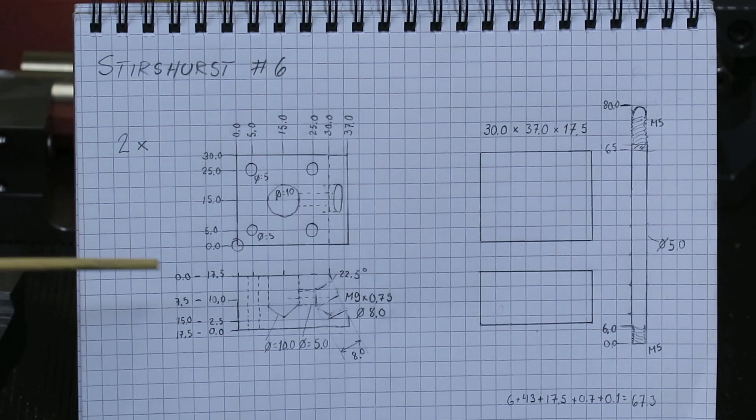So it's a rectangular piece of steel which we then will make into Swiss cheese. There will be one big hole in the center and one slanted side, at 22.5 degrees. Then there will be a 9mm fine thread, and 4 holes poked all the way through. I guess that's about it. Oh yeah, a small hole here in between.

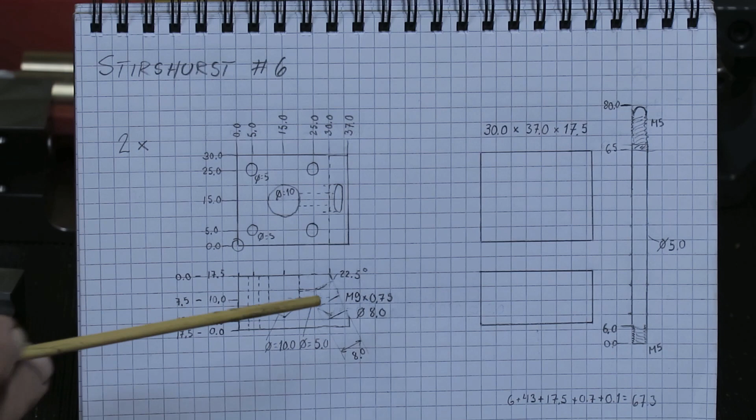So this is one of those. We start in the mill and make 2 couples of pieces like this. The material I'm going to use is this, which you probably recognize from the earlier project. It was scrap, now it's raw material.

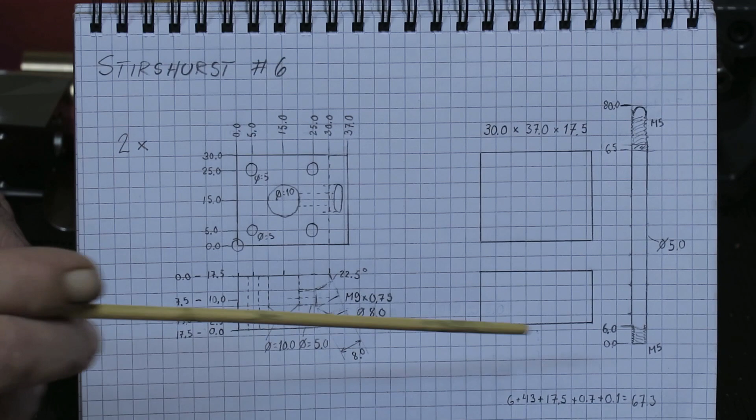And then we will make 8 couples of studs like this. Very simple. Well, I don't have the 5mm stock, so I need to make it from 10mm, which is really abundant, so I will use that.

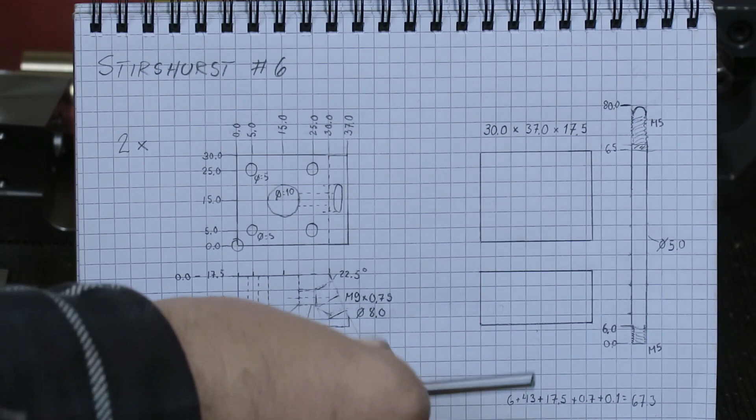I tried already, so you can actually make it quite neat. This is just a try to see how it goes in the lathe. It goes well. Okay, and that's too short, so let's start with milling this one to the correct size.

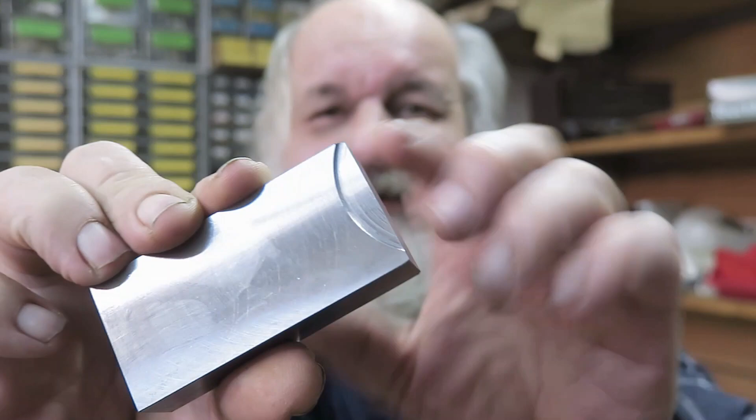I almost ruined this material. If you can see this here, I was supposed to take 0.1mm off this one. This is now exactly 0.9mm below the surface. For some reason I thought, okay, 1mm more, it should have been 0.1. So now, luckily, I looked at it again and that doesn't look like 0.1mm. No, it does not. And we have barely enough material for this one.

So, next step, I will clean the mess I have made. It's quite a lot of that. After that, I will use this slitting saw to take 2 30mm parts of this piece. And why slitting saw, why not hacksaw? Because it takes care of the finished surface in one go. So that's the reason why slitting saw, and I have that. So that's another reason. One of the things you should really do, and do it properly, is clean up.

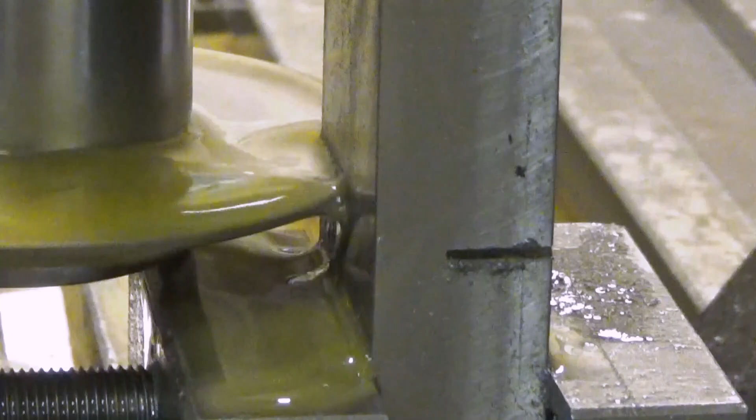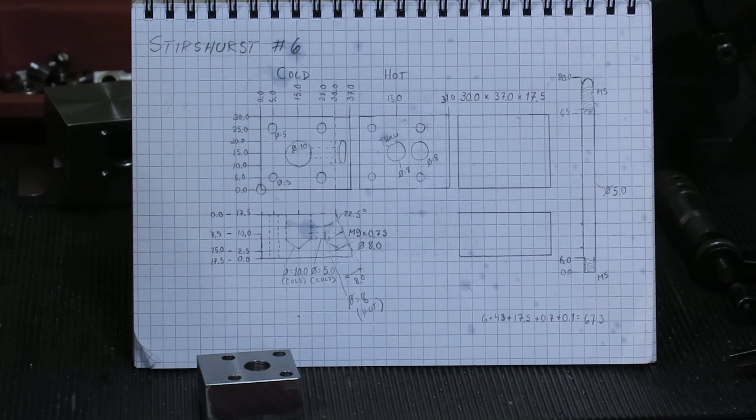The slitting saw was both a bad and a good idea. It was a good idea, but I chose the wrong type of slitting saw, so therefore it was really noisy. I managed to get a very bad surface finish in some parts here. But now everything is all right. And this one, I already did something here — I made this Swiss cheese thing here.

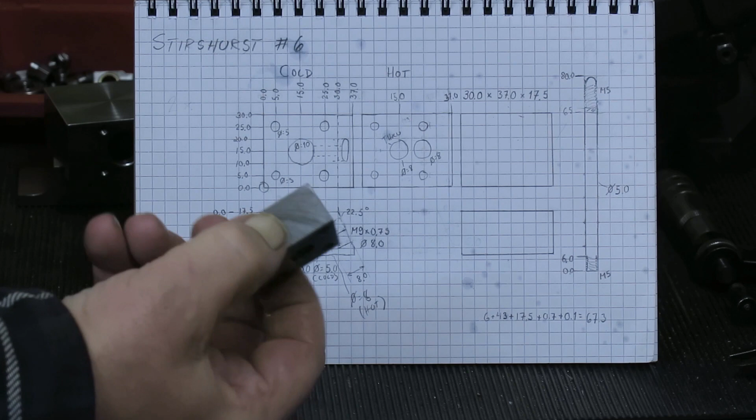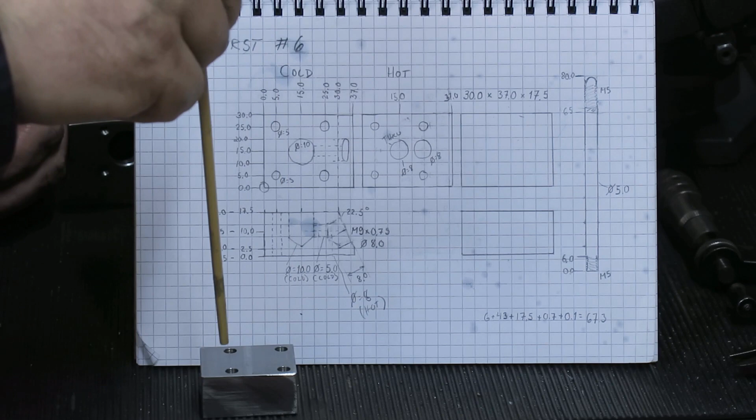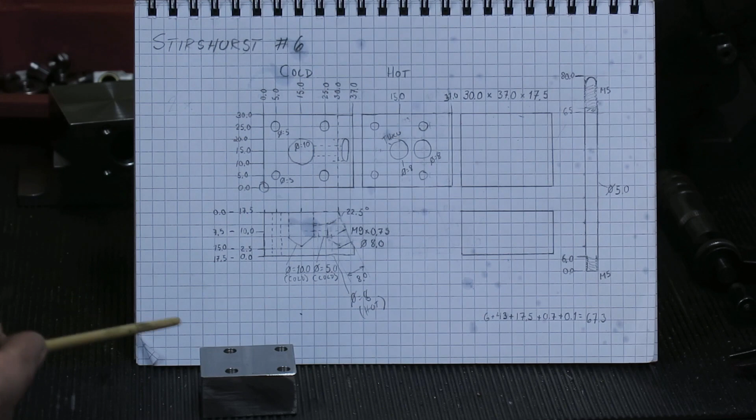So now there is a change of plan. Namely, it won't be two identical pieces. It will be one for the cold side and one for the hot side. The hot side will be different in that there will be two holes all the way through on this side. The center hole will go all the way through to the cylinder, and then we'll have another one which is not all the way through, so that I can put a loop of copper tube here. This is of course to collect the warmth — a heat collector, so to say. And the cold side is as stated here.

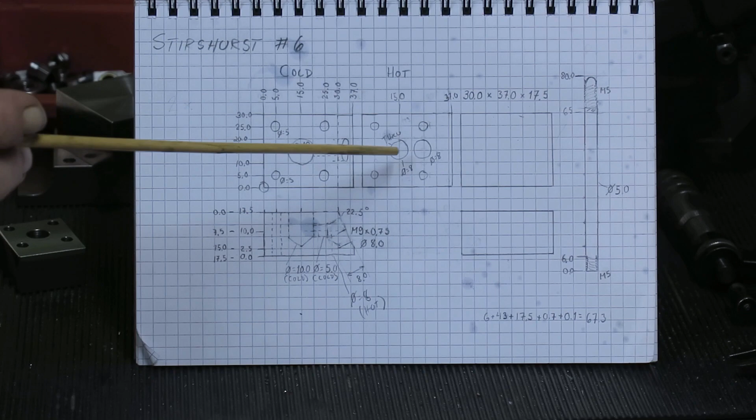So now what I will be doing is the hot side. I already did this, so some of the settings are already in place, but we need to do some dialing for the x-axis, and then we just drill a few holes.

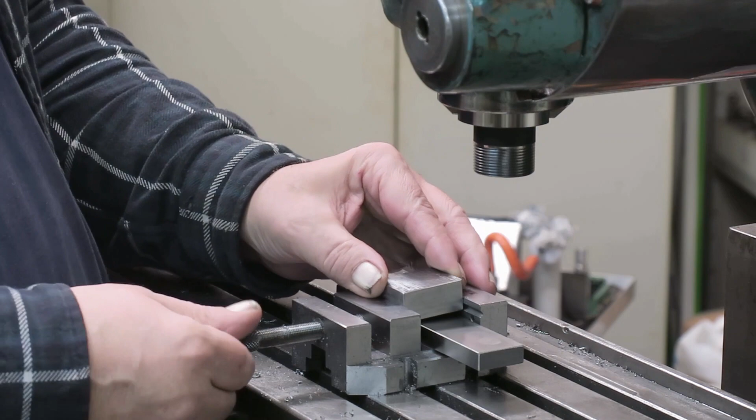Put this piece into the vise somewhere here. I have already cleaned up this quite well, so there won't be any chips on the way. So now it is there somewhat, but it's not tight enough. So, as always, a little bit of hammering, very gently. You can hear it's not all the way in. This was not successful. Now it is.

You can also — okay, well, this lifts the jaw, I believe. Well, this should be taken off anyway. Well, it is now there. It's good for our holes. Anyway, set this one to our reference side.

Well, I have purchased a new tool — yeah, this one. And we need a little bit of speed with this one; it won't work with low speed. We'll do a little bit up, I believe. Let's see now. We don't need to adjust the Y because it's already adjusted. And now I'll just — well, yeah, let's see.

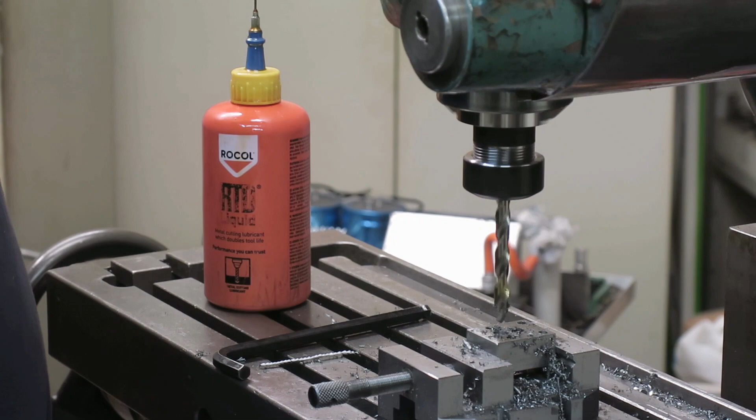Okay, now this is ready, this part of the job. Next thing I will again clean a little bit because I need to change the vise here. This is not a good vise for what we are doing next.

So I have another type of vise for that. Setting up the angle to be able to mill this tilted surface on these ones. This is a vise that I purchased quite a long ago, mainly for manual jobs, but it has proven to be quite good for this one.

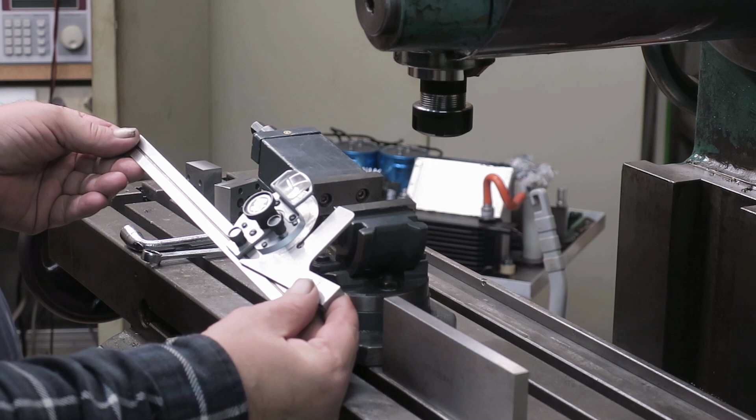Okay, so this one is my Hahn & Kolb Stuttgart protractor. I have set this up to... have I? No, I have not. It's 11.5, it should be 12.5 degrees. Now it is. So, no, and not 12, it should be 22.5 degrees.

So, 22.5. Huh. Oh yeah, hopefully this is okay. Okay, maybe I can. I have to.

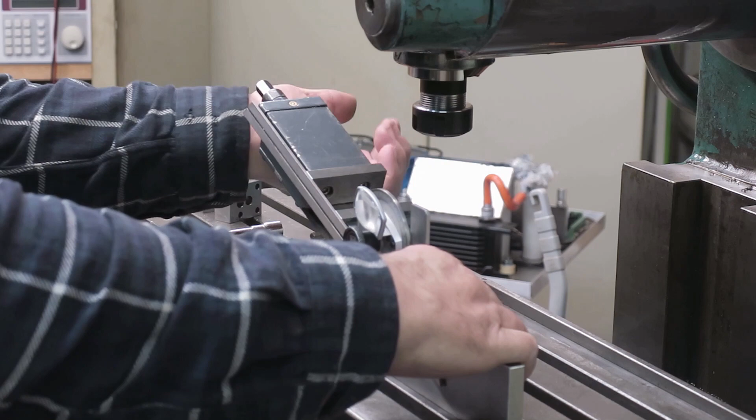Oh yeah, okay, so now I will adjust this vise to be on that. Okay, I can do this. So I feel these edges here, this is a little bit awkward. No, it's quite near, now it's over.

There you are. It's not like second precision, but it suffices for this job. And now I tighten this, and now we should be in the correct 22.5 degree angle here, so it should be half of 45 degrees.

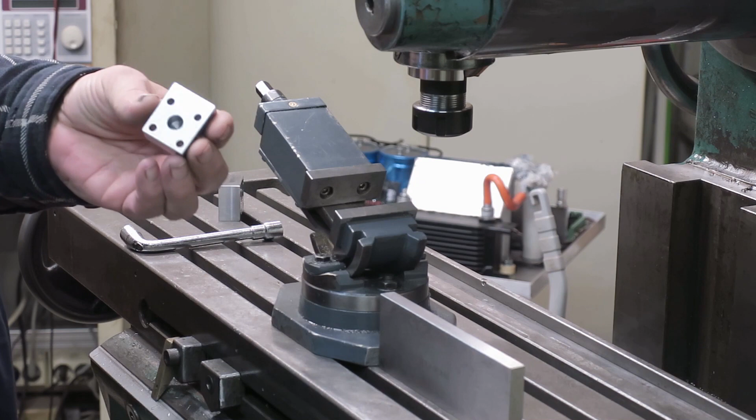And now putting these into the vise, it's really important that you put them in the correct way. So this is the top side and it should be tilted this way. If I put it that way, the end result will be wrong. This way, right.

And also there are some things where it really doesn't matter in which orientation this is. Because this is not 13 millimeters, it will be 14. Why on earth do they put different fasteners here? Yeah, it is 14.

So this orientation doesn't really matter. This is because all that matters is that it is planar in horizontal orientation. So I will put it somewhere like here. There you are, and now tighten the vise.

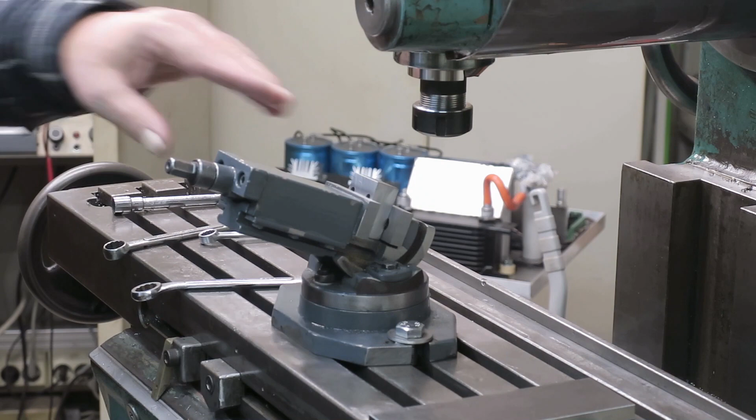Well, there you are. First piece is there, and now hopefully I need to recheck this one. So it's lower this side, and this is the underside. Yeah, that's correct, and this is actually the cold side cylinder head. So okay, next step, mill it down.

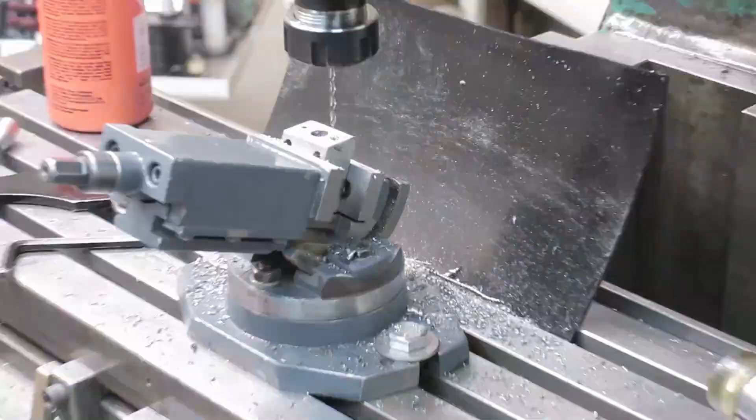Okay, so this is the one where we are going to need a loop here, and well, it should be made out of copper for good thermal conductivity. It's a quite tight loop actually, they are quite near each other. It's 8mm in diameter, and I have the proper material for this one.

Okay, well you could just do like this and bend it, but it would not work. There is a good reason for that. It would deform in the middle and probably block the passage of air inside there. Not a very good idea.

And now, what we are going to do is to fill this tube with, not with steel wool, but with water. I have now pre-soldered this end and that end, and the whole tube became really warm.

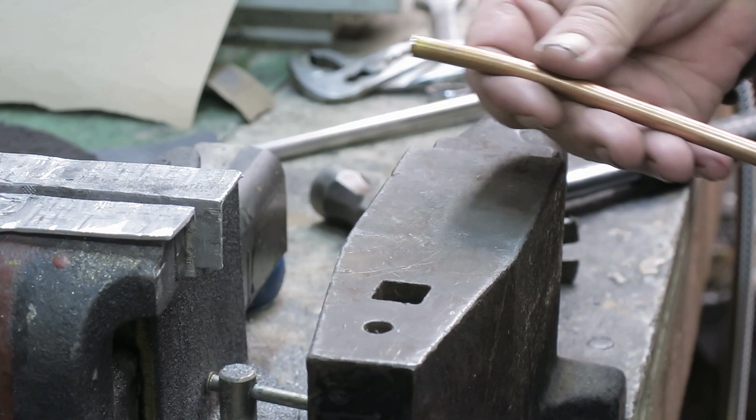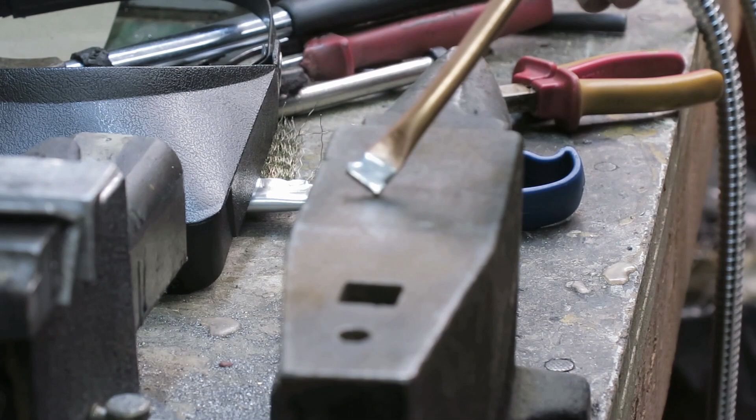And now I will flatten this one. So it is quite flat. And then I will clean it up a little bit from here, because what I'm going to do next is solder it again. Okay, now it is soldered.

Next step around here will be to fill the tube with water. So now this one is completely filled with water, and I tried to make absolutely sure there are no air bubbles inside there. The next step will be to squeeze it at the end first.

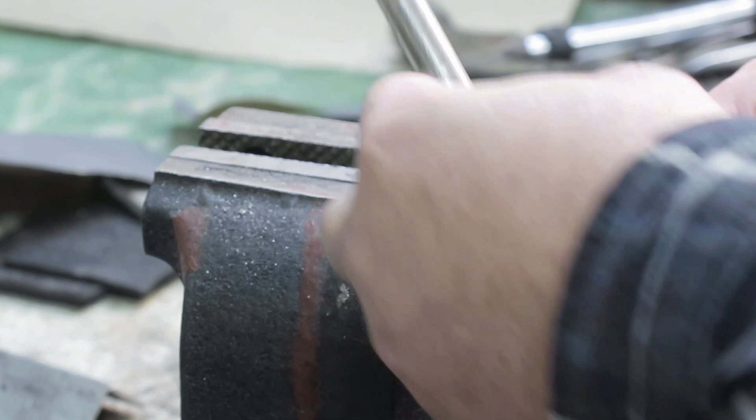Let's do this in the vise. I'll take this off, so I will squeeze it from here. I try to make sure none of the water escapes from there. Starting from here, I'm still trying to avoid this one.

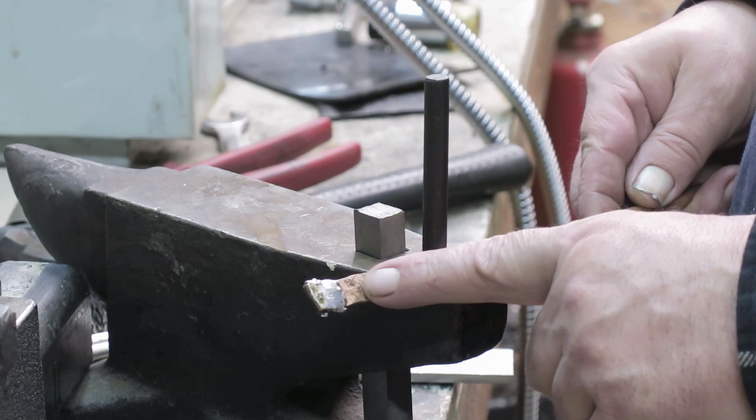Now, this is the moment of truth. I did some soldering here. This was really awful, it tried to boil, so I needed a lot more of this, and after that I was able to solder it without it blowing all the solder away. Now it should be airtight.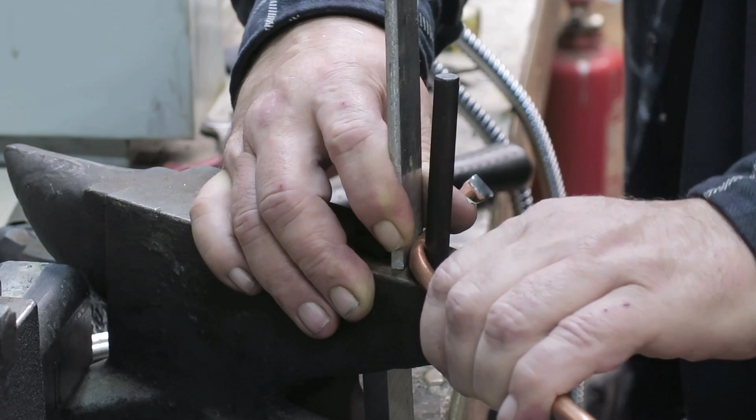So now this is just my setup. Well, now let's see, really the moment of truth. Oh, let's see, this is awful. I'm a little bit scared of this. What happens here? Well, it definitely does not work.

Now, that wasn't very successful. The next method will be to use water, but this time we will bend the end first. And now I go and fill this with water. Now it's filled with water, and I will squeeze the end.

Okay, what I'm going to do now is to freeze the water. Now here is our second moment of truth. It has been sitting in the deep freeze the whole day, and what has happened is that I put the glove to isolate, not to warm it up. So it has swollen on the other end, as you can see.

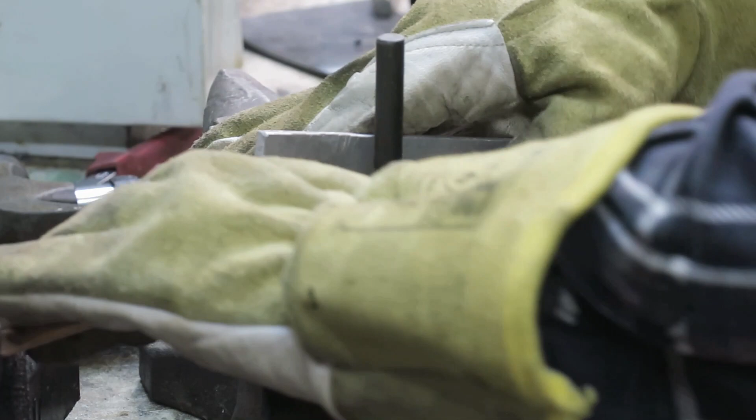Okay, now let's see if I can bend this better now. Moment of truth, really. Oh yeah.

It didn't go well as I would expect. A little.

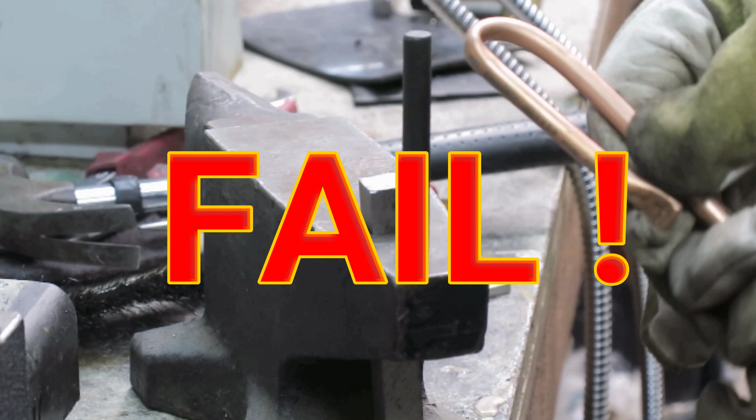This is now my third option to make that very tight bend. The tube edges would be only 2 millimeters apart from each other, and that kind of bend is next to impossible to make into a copper tube of this thickness. It's 8 millimeters outside diameter and only 1 millimeter wall thickness.

So what I will do is cheat. First I will put this drill bit inside there. This is a 6 millimeter drill. I'm not in danger of filing my drill. So in order not to squeeze the tube, this tube cannot be attached into the vise without squeezing it unless you have something like that inside.

Next thing, I will file 45 degree slots there. I will start with this triangle shaped file because it goes faster. Okay, now I change to this one, a number 5.

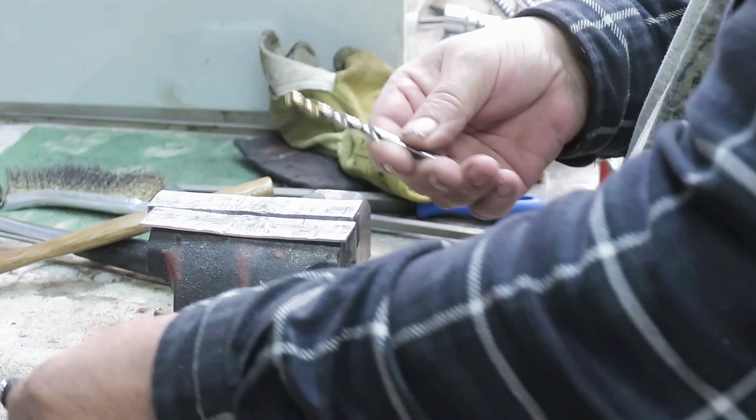And no drill bits were harmed during this video. So, first of all I have cleaned this up, deburred it and whatever.

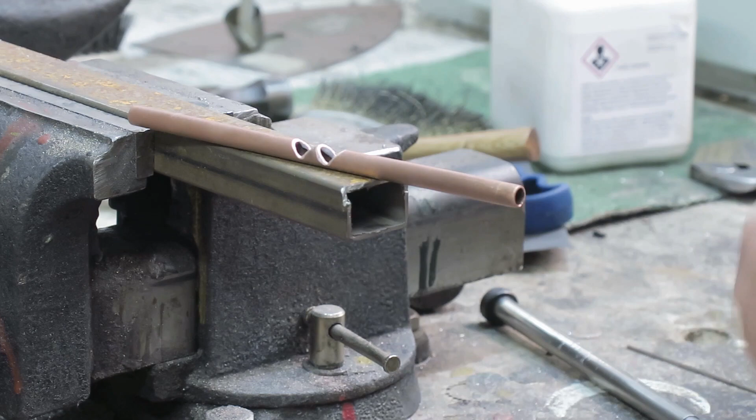So what I need to do is put some flux into there. This is just flux. And the rule of thumb is that you put flux only where you want to have the silver solder. You don't need a lot of this, just some.

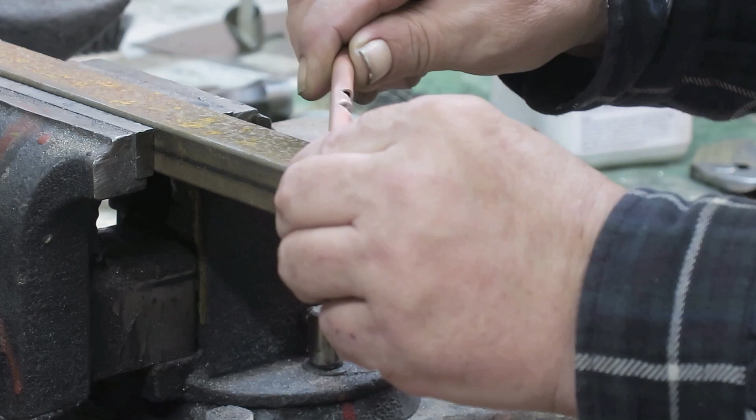And now, bending. Let's see how this goes. That was bend number 1, bend number 2.

Well, it looks like it looks. How would I do this? Ah, now I know, I will put it this way. But then I need to turn this way, otherwise I will end up in some mess at some point when it drops off. Of course it will drop off on me. Okay, there you are. Now just warm it up.

First, just gently here, just to evaporate the moisture. I have here some extra flux, if I ever need it I will put something into my stick. Did it go there? Okay, now it does. And this will happen probably very quickly. Note that I'm not heating it from here.

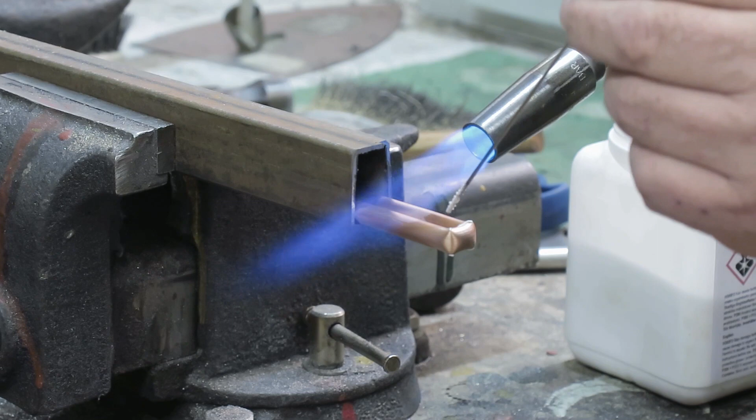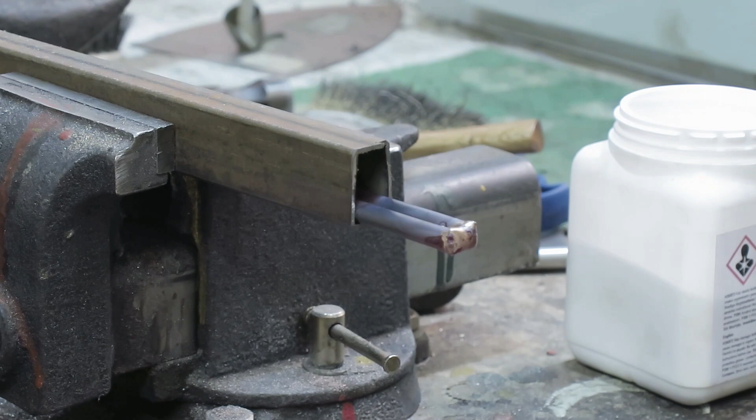Okay, now it looks like we are going to... That's probably more than enough. Let's see how that comes out.

Well, it was amazingly easy. Copper seems to be a good material for, not brazing, this is silver soldering. And it starts to drop off. We need to wait until it cools down and then see what kind of surprise is waiting on the underside.

Aha! You can see this. This is perfect, this is perfect.

First of all, I cleaned up the ends of these tubes really well, degreased this piece really well, and then I put some flux in there and placed some bits of silver solder around there. There is a quite big chamfer which I'm now hoping to get filled by silver solder, and then by capillary action it should go into the joint as well.

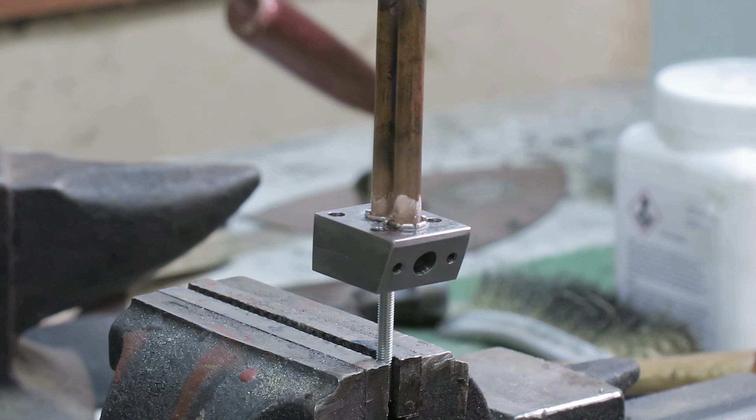So let's see what happens here now. This might backfire on me. And yes. Okay, let's see, first a gentle warm-up to get rid of the water in the flux, it's water-based so there is water as diluent. Well, looks like we are quite soon there. Yep, okay.

And I will warm this from the underside because the silver solder follows the heat. Oh, beautifully. Hopefully it does the other side as beautifully as well.

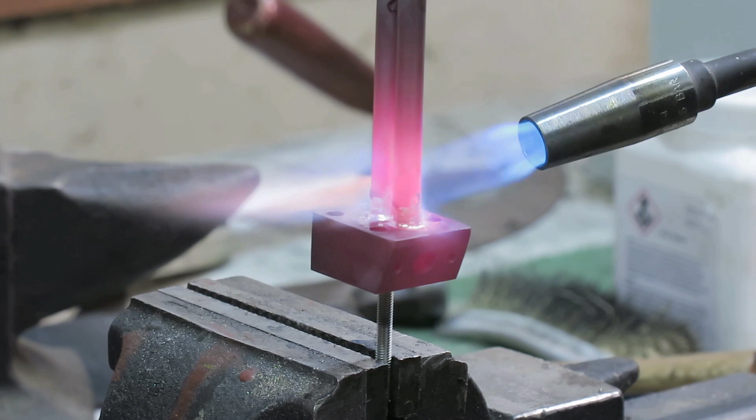Oh yeah, now it's melting, melting. Okay, let's take some heat to the copper, but it conducts the heat into the cap. Yes, it does, and it did well. Good. I think we are there.

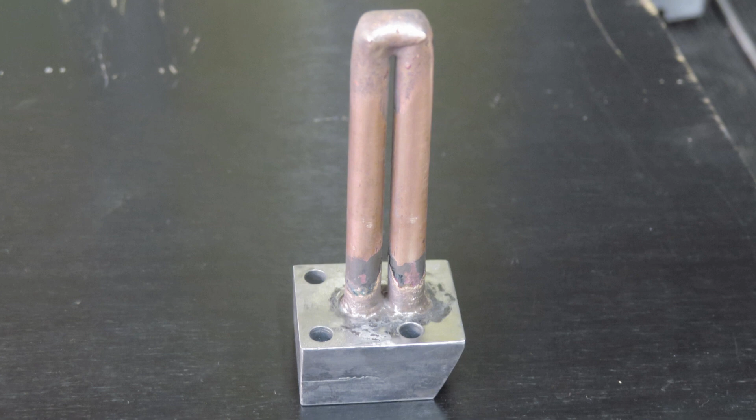Now I tried to remove the flux residue from this one, but it seems to be really hard to remove. Anyway, now it's reasonably clean, and the copper tube looks as if it should be. I haven't tested it yet, but I'm quite confident this is airtight.

And the other one, the cold side cylinder head, it is what it is. I deviated from the original plan. We should have had here M9 fine thread, but I decided that okay, I will make a flange here, so the orientation becomes correct every time.

I did promise that we are going to make the studs to attach these to the cylinders and the base, but nah, they are just simple lathe work. Just make a 5mm thing and then thread it on the ends with a die.